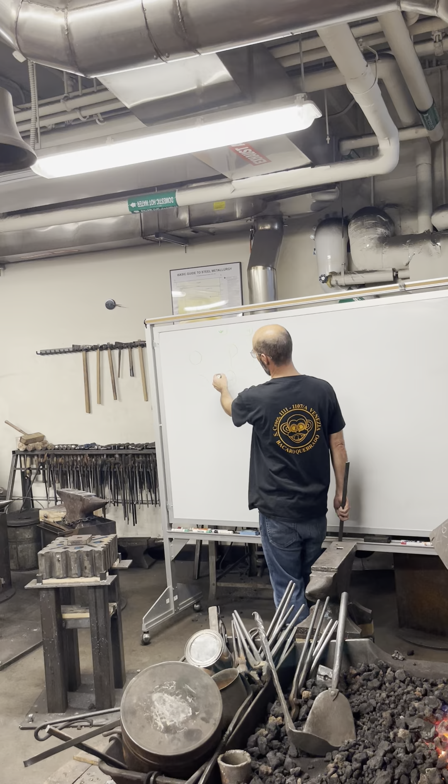So this steel, and you may not have seen this yet in class, but iron atoms at room temperature want to arrange themselves in a cube. So what that means is there's an iron atom at the corner of every cube. And actually at room temperature, there's also an iron atom at the center of the cube. And this crystal is called BCC.

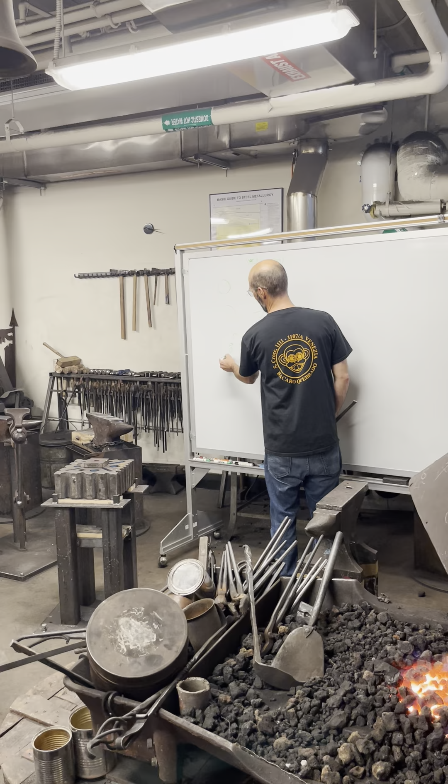Does anyone know what BCC stands for? Wow, it stands for Body centered cubic. Because there's an atom at the center of the cube, right? It's centered on the body.

This is, when the steel is in this formation at room temperature, it's as soft as it can be. So I can take this bar, this is from the factory, it was rolled hot, they put it on the ground in a giant mountain of other hot bars, and it cooled really, really slow. And when things cool really slow, they go towards the structure that is normal at room temperature.

And the behavior of steel in this form is really deformable, right? So this is good because it's plastic, but this isn't very good behavior for a knife, right? You don't want your knives to bend. Something that's this soft can't be sharpened really, or if you did sharpen it and you cut, you took your cleaver and you hit a bone, it would immediately deform.

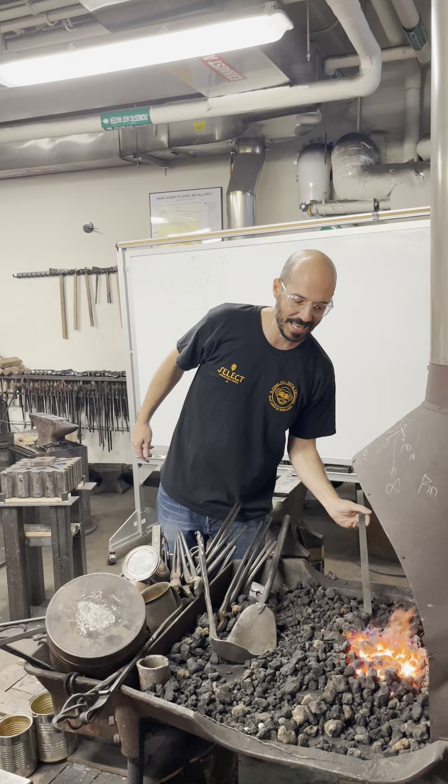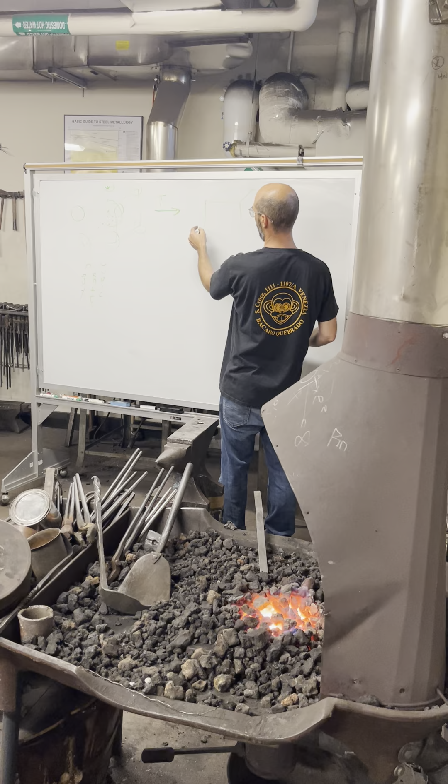If I take this and heat it up at high temperature, the atoms want to rearrange themselves into a different shape. It's still a cube, but rather than being body-centered cubic...

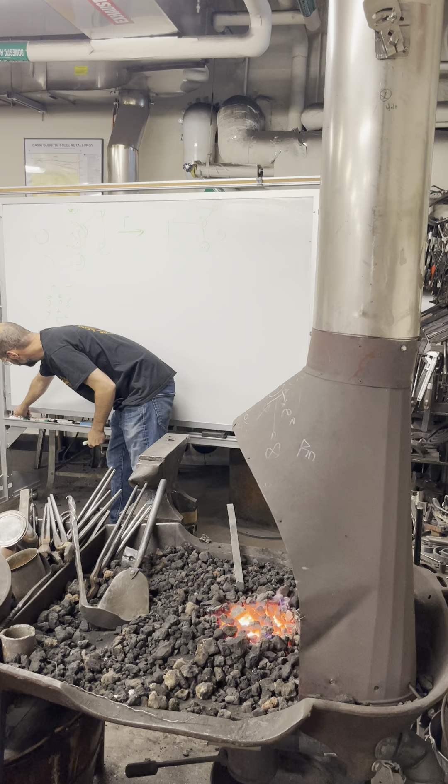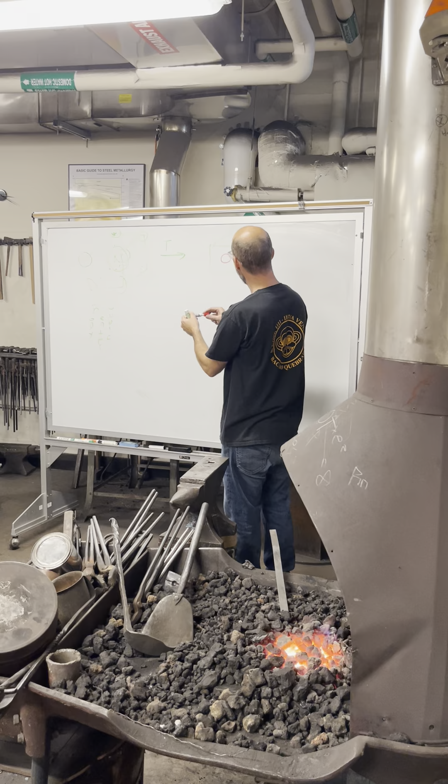you have a cubic structure with atoms at every corner, iron atoms. And then you have also iron atoms at every face. So this is FCC, face-centered. And this is the high temperature crystal structure.

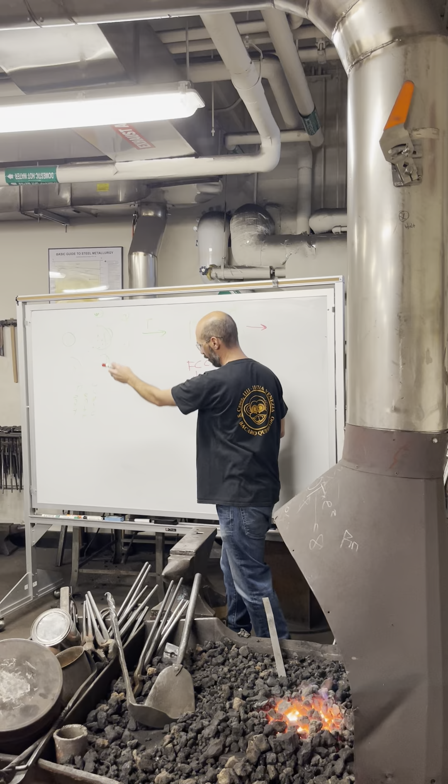So you heat it up, the atoms rearrange themselves this way. You cool it down slowly, they rearrange themselves this way. And then what I'm going to do, so if I heat this up and let it cool down, it's going to be soft again. It's going to behave the same way it behaved before.

If I take it this hot and I quench it in water and cool it down really fast, there isn't enough time for the atoms to move back to the structure they want to be in at room temperature, and they go into a different crystal structure, which I'll show you in a minute.

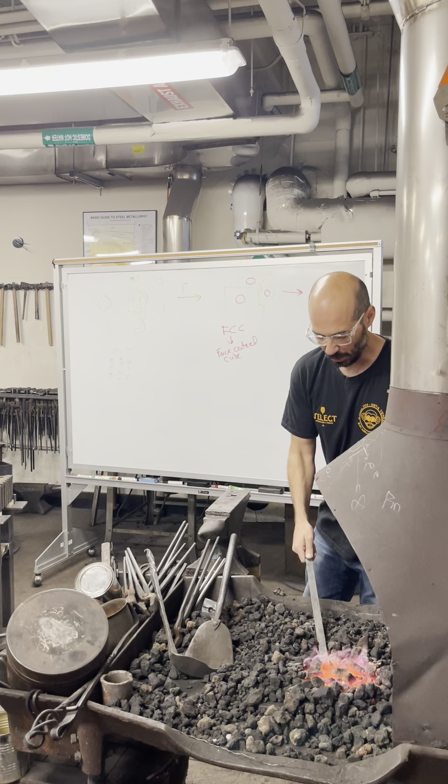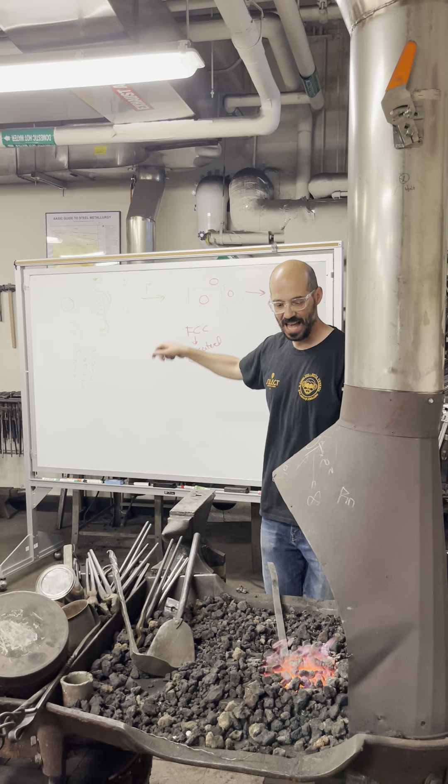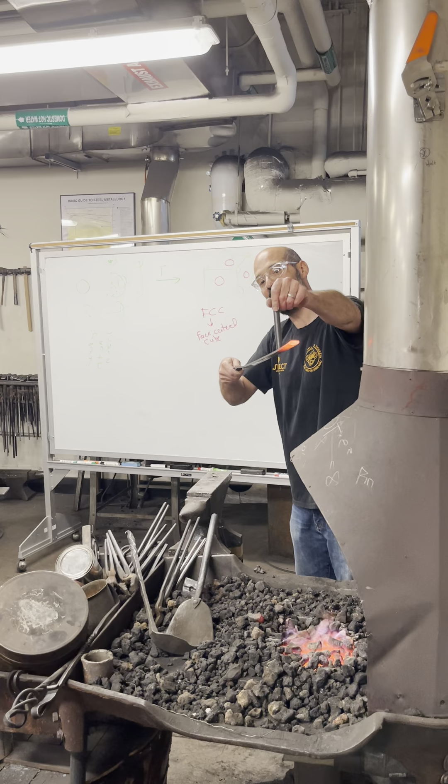Now the other cool thing about this transformation is that this is magnetic. This is not. So I can tell with my magnet here, see how it sticks there? I can tell I've transformed because this won't stick, but right there it will. So right here it's BCC, and right there it's FCC.

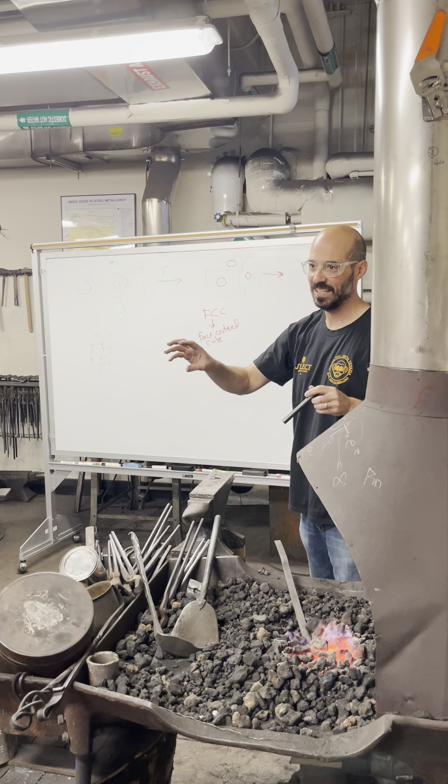That's why stainless refrigerators, washing machines, dishwashers, we try to put a magnet on it and it doesn't stick. Stainless steel has nickel atoms in it, and the nickel atoms make the iron want to have this structure at room temperature. This structure is not magnetic.

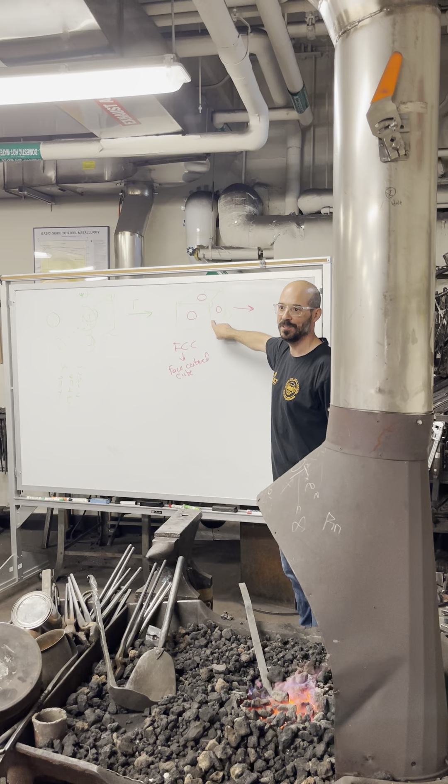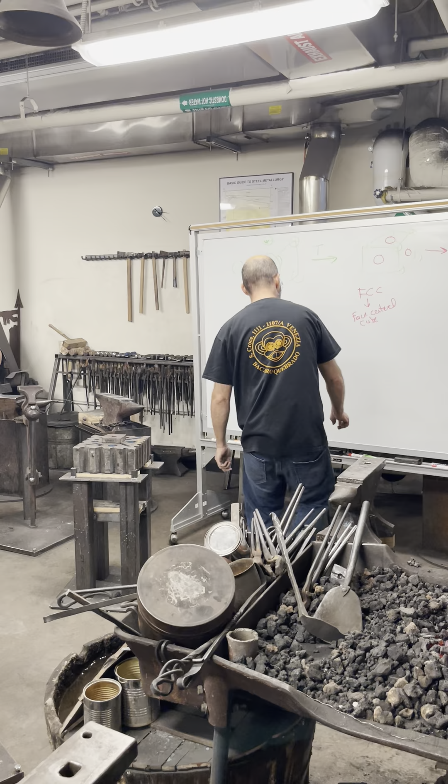So I'm going to take this now and quench it and cool it off. And this is now cold. And what happens, because I didn't give it enough time to go back, is I get now a third crystal structure that is sort of a mix of these two things.

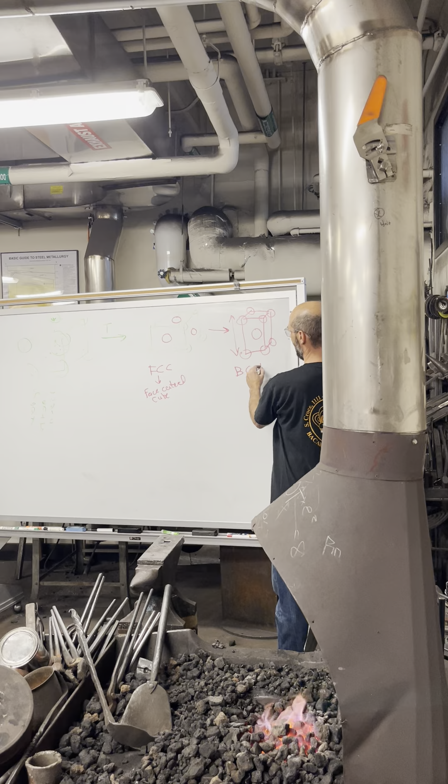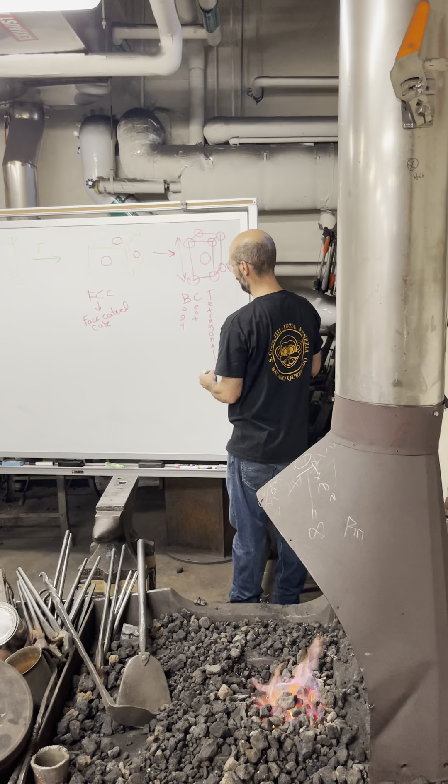It's no longer cubic. It's longer. It's rectangular in cross section. And this is called BCT, body center tetragonal. This is a tetragon. And this crystal structure is really stressed because it's stretched and it's very, very hard.

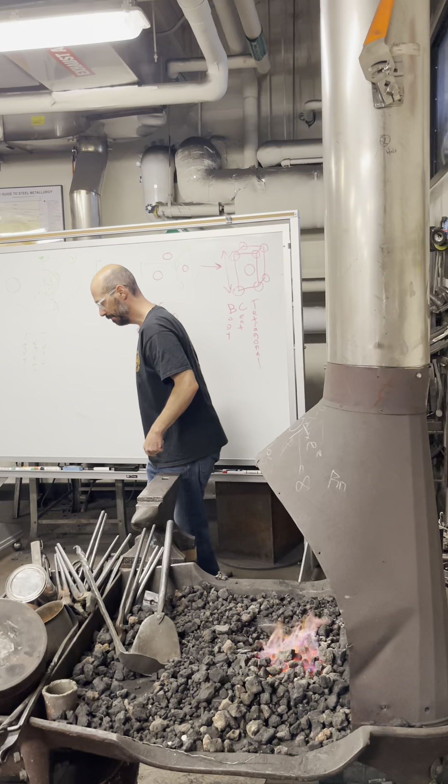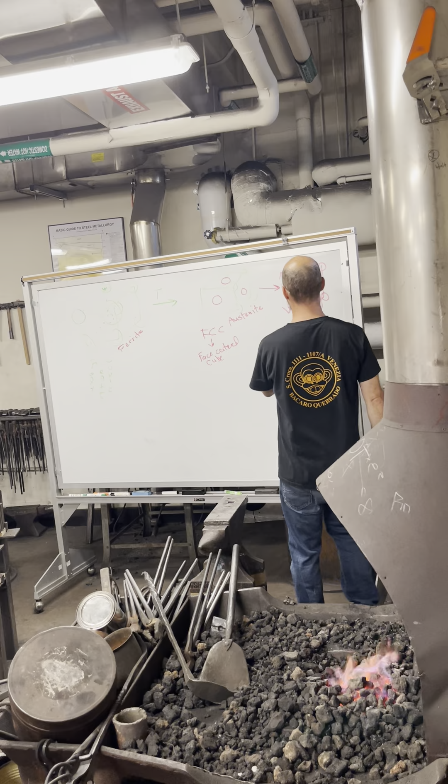So right now, by the way, this is called ferrite. This is austenite. And this is martensite. So martensite is as hard but as brittle as can be.

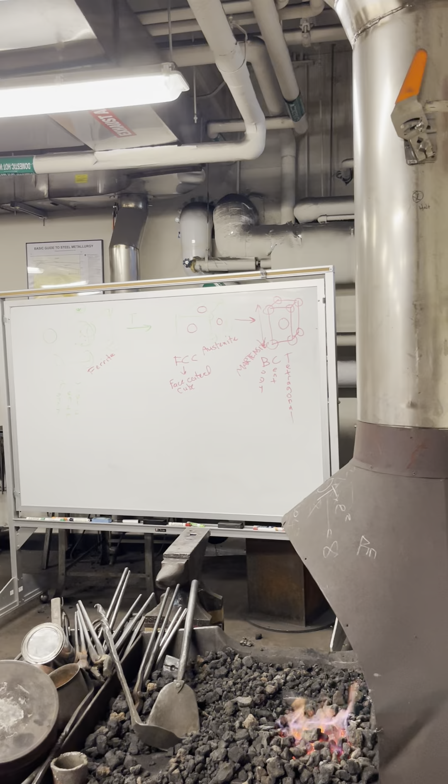See how brittle that is? Very easily broken. So this wouldn't be good for a tool, a chisel, a knife, because if you drop that on the floor—and I've done it—it'll break.

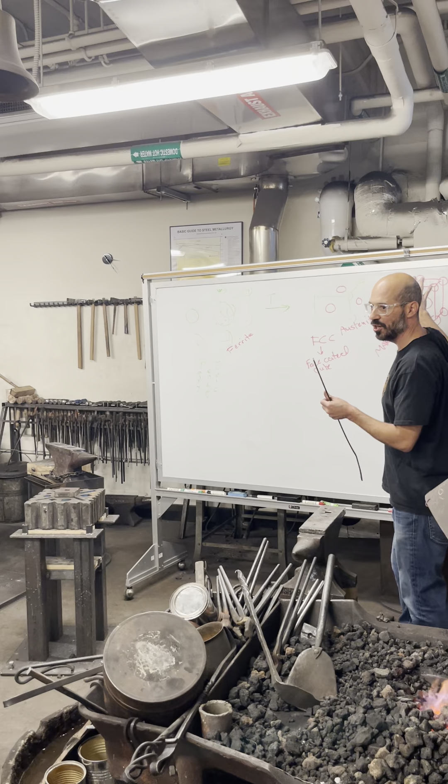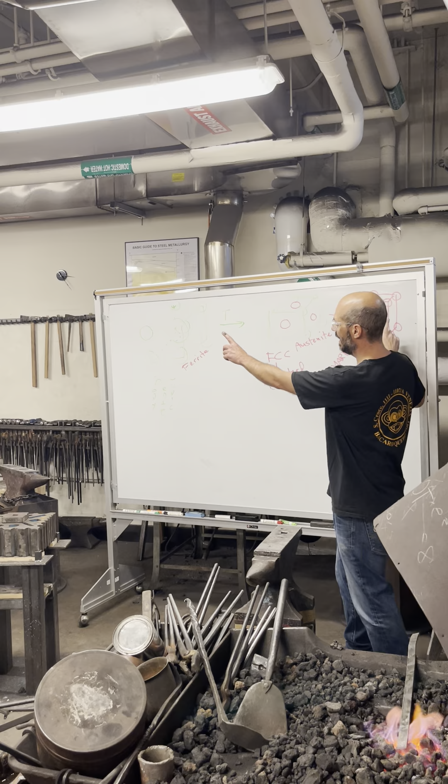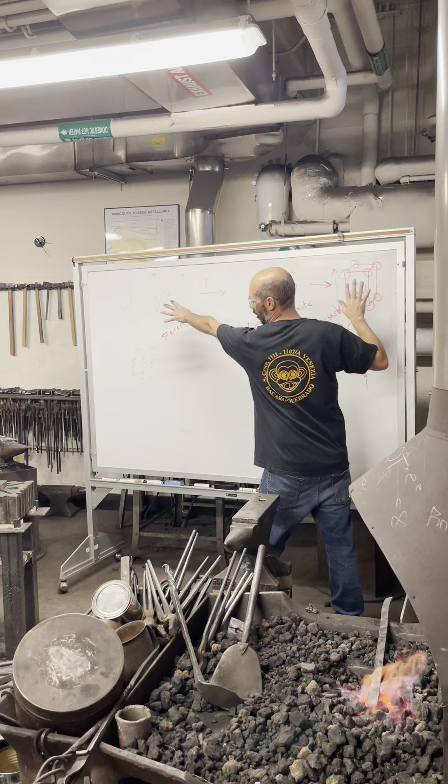So what you need to do, and this is sort of the magic of steel, is if I take this crystal structure and heat it up again a little bit, you relieve some of the stress. You start to drive the crystal structure back towards BCC and make it softer. Depending on the temperature I heat it to and the length of time, I can make this steel behave anywhere across this whole spectrum of behavior. I can make it as hard as I want, as soft as I want, or anywhere in between.

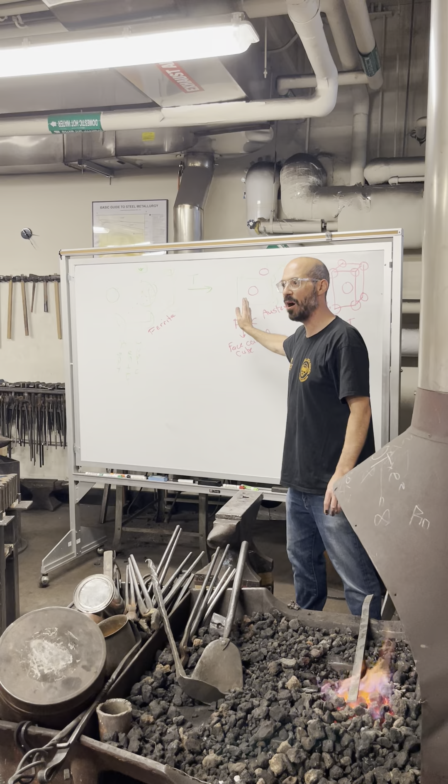And I can pick a spot where it's going to be hard enough, but also gets tougher and won't break. That's called tempering.

And that's what I'm doing right now, just by heating it up. The structure is still going to be martensite—still body-centered tetragonal. But it's called tempered martensite, and it's a balance of hardness and toughness. So I want to get this to be just barely visibly red, and that's sort of the heat that gets me to a good balance of hardness and toughness.

And then I'll quench it again. And then I'll bend this one, because when the toughness increases, it takes a lot of energy to break it. And if it does break—you know, I've sent people flying before when I let them do it themselves.

So when you see blacksmiths working on iron, they're heating and working and then quenching—so where are they in your process?

Most blacksmith stuff like this has almost no carbon in it. The hardenability—I didn't get into it because it's a little much—but the ability of the steel to get hard is a function of the carbon. So with the material they're using, and that we use for the most part, you can quench them and they don't get hard. They form austenite, but they don't form martensite. So they aren't hardenable, and you can quench them all they want, and in theory it shouldn't get hard. Now with modern steels being so recycled, they're not so great, and they actually do harden a bit, but nothing like this.